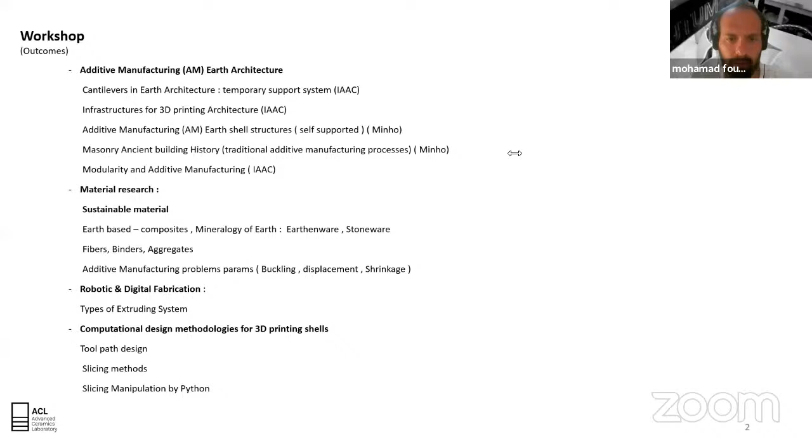And for the moment, we are trying to develop self-supported geometries in order to print shell structures. We are also making deep studies of the history of ancient masonry buildings, trying to mimic the building methodologies with adobe and translate them into 3D printing technology.

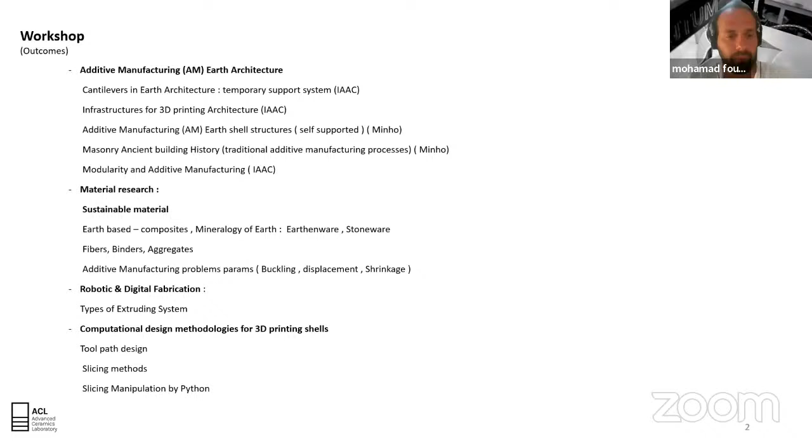I'm sorry, can you please?

Okay, I'll start now. This is the first project that I did at IAAC, my master thesis, and also in OTF, Open Thesis Fabrication. We studied earth material in depth and how to integrate it with the 3D printing process, concentrating on printing only cantilevers, or we can say corbels. First, we started with small prototypes, printing without any support to see what we're facing with the 3D printing process, for example the buckling issue, since we're printing layers of clay.

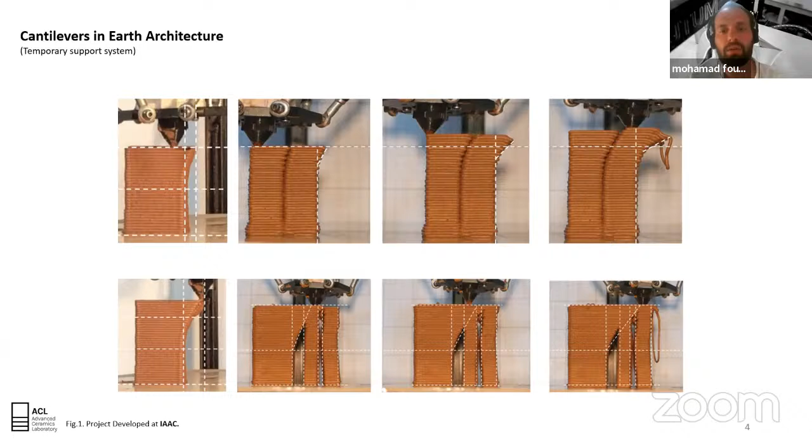After that, we started to add some printable supports to see if that would help prevent this problem or not. We tried different methodologies, and also made small prototypes of temporary support systems, trying to find out if that would be efficient through the printing process in order to print a complete cantilever, or a complete catenary arch.

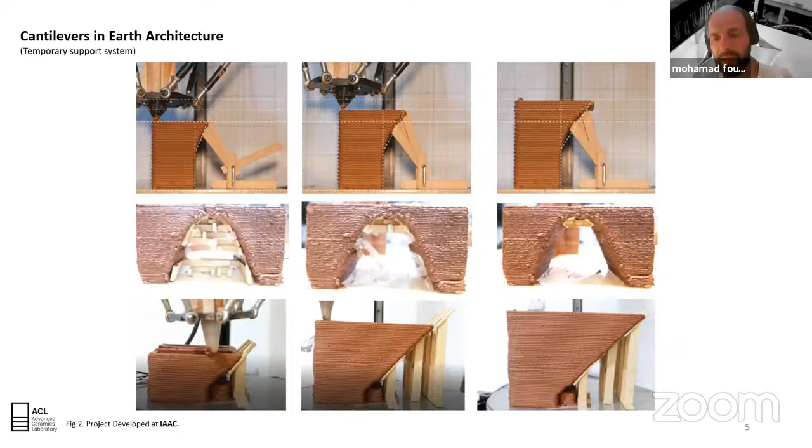After these experimenting processes, we made a transition to a larger scale, printing on wooden support systems with the robots, and trying to find out the best way to prevent the many issues we faced through the printing process. The main issue is the buckling.

Also after drying time, we are facing a shrinkage issue, and especially, as you know, earth material really works with compression, but with tension it doesn't really work properly. So, okay.

I'm talking about this project because I want to say it wasn't really 100% efficient, mainly because we found out, after adding a large amount of wood and trying to print on top of it, that we were trying to prevent one problem of the 3D printing process and manage it on the construction side.

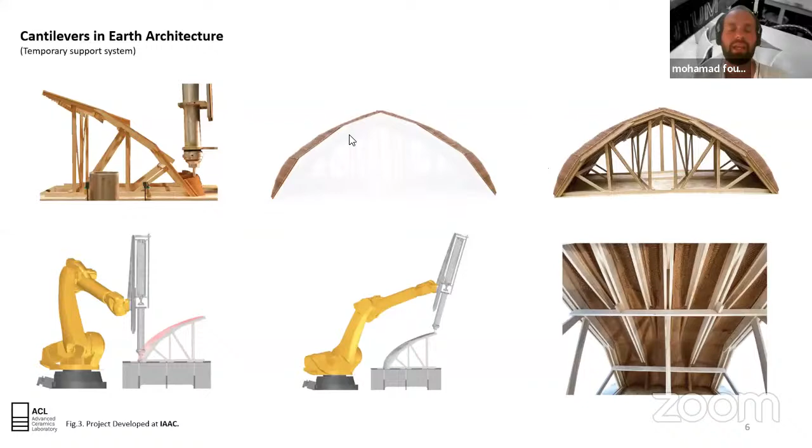So basically, from my point of view, I'm now trying in my PhD thesis to develop the geometry more, using computational tools, in order to print something already stable that doesn't need a lot of support from another material. So that is now my goal that I'm trying to reach in my PhD thesis.

In the PhD, you need to concentrate a lot on one point and try to tackle it in terms of materiality, and in terms of how you can develop the machinery part to support you in achieving your goal with 3D printing. So first of all I'll talk about the materiality part and the issues we were facing, especially with the earth-based composites.

The main issue with the 3D printing process is that we need to develop something with less shrinkage after drying time. For that reason, we tested two types of earth, one from Spain, named eco clay earth, and also one from Portugal. Here there is a city named Barcelos, really famous for stoneware clay, and the one from Spain is earthenware.

We did different experiments with different types of fibers, because we found that many researchers were adding fiber to reduce the amount of water inside the composite, in order to prevent cracking and shrinkage after drying time. But since we were adding a lot of fibers, we needed another binder to increase the plasticity of the material so it would be printable on the construction side.

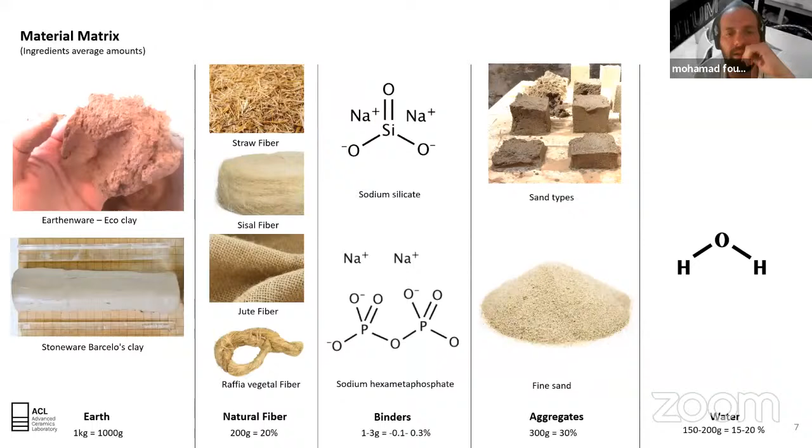After these tests with the ingredients of the composite we're developing in this research, we started to learn how to control and know how much water the fiber is absorbing in each composite. Because once we can develop a formula that will... I'm sorry, yeah.

Since we are trying to control the amount of water and the amount absorbed by the fiber we add to the composite, we did simple experiments, developing a mold for each kind of composite, then measuring the weight before and after drying, and comparing the two phases to reach a percentage and know that, for example, this type of fiber is... yes, I'm sorry.

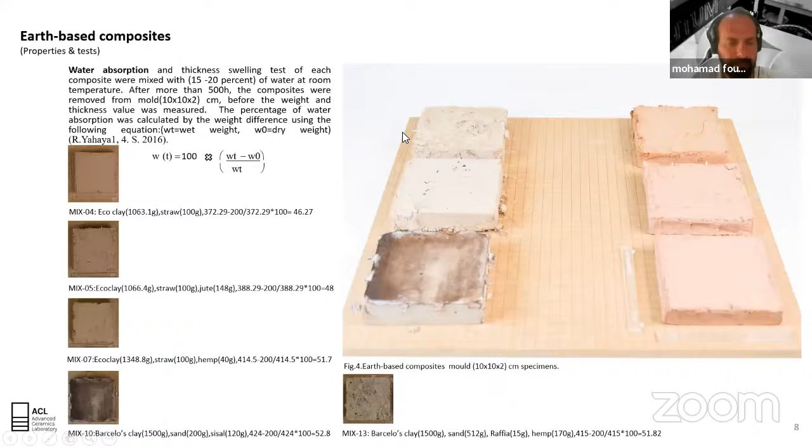So actually, as you can see here, we were testing with the Lutum 3D printing machine, and basically we found out that with the stoneware, with the simple amount of fiber, it was kind of easier to extrude than with the earthenware, the clay type that I was explaining before. So basically, we were trying to find a formula that controls these types of ingredients, like the amount of fibers, the binders, the aggregates that we add, and also the amount of water, in order to know that this composite will be extrudable, first of all, with this type of machine.

But in order to print more complex geometries, you need to control different parameters in the machinery in terms of flow of the material, in terms of the extrudability and buildability of the material, and the bonding between the layers. So all these issues are not just related to the type of composite that you are developing. It's also related to the extruding system that we are developing.

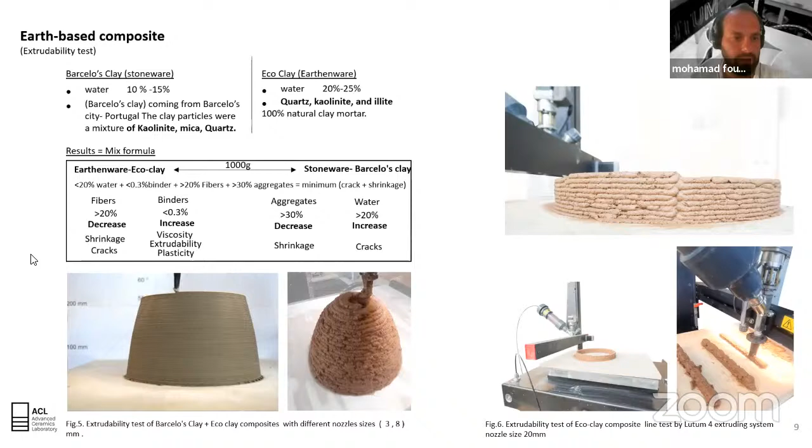Okay. For that reason, we started in this research to go further with the extruding system, how we can develop something that could extrude these types of composites with the fibers. And actually, it was really a bit hectic, because in order to extrude these kinds of composites, you need to control different parameters: the torque of the motor, and also the way that you push the material inside the extruder. So for the moment, we are developing a more advanced system than the pneumatic system. It's more of a linear actuator pushing system.

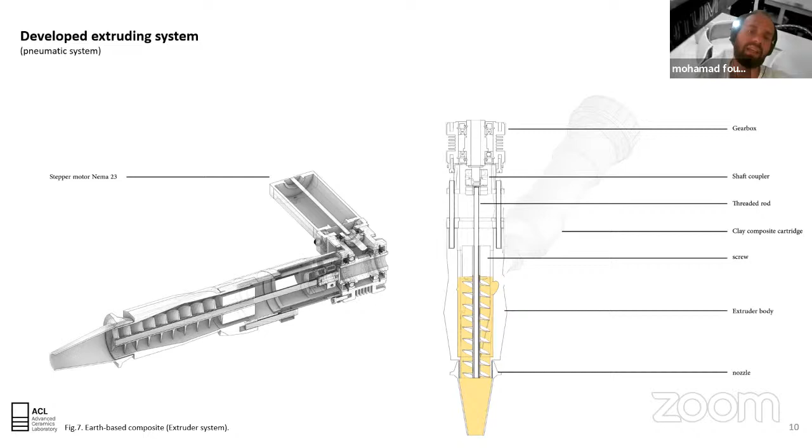Extruding a composite with fiber is really hard to do, but if you can develop something with high torque to push this composite, actually you can do it. But for the moment, in my thesis, I'm still developing this system in the coming months, and I will share it with you probably on the website in the university platform, University of Minho.

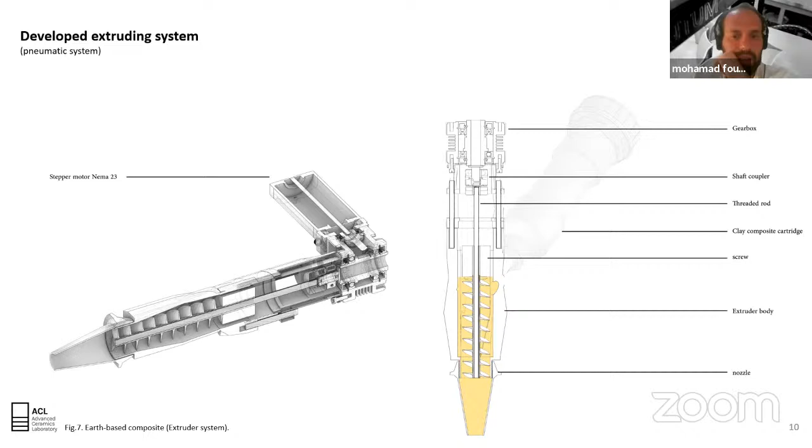So I'm saying this because in the construction side, there are a lot of systems that were developed by expert companies like WASP in Italy, and also other companies in different parts of Europe and also outside of Europe. But when you want to go on the construction side, you need to think about how you can add less material, because most of the projects developed with this material add a lot of material in order to be stable through the printing process.

And I'll also talk about the infill design and how you can develop something with less material, and also how to reach complex geometries like a vault and dome in easy ways. So in the construction side, for the moment, especially if you know about the crane system, it's not easy to control the printing process if you want to print a complete shell. If you want to print a vertical wall, it's fine for the moment. So now we are still developing this system, the pneumatic system, in order to successfully print earth-based composites.

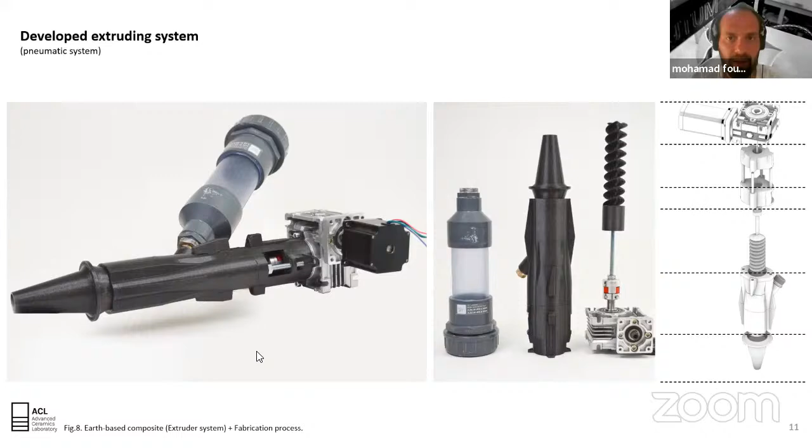But the main issue, I'm sorry, it just takes time to move to the other slide. Just give me a second, please. Okay.

So before starting with this topic, like I was saying, normally in order to extrude this type of material, you need to control the materiality and machinery part. You need to know that the machinery you are using, especially in the construction side, will support you to extrude these types of composites, and also to print advanced geometries like a shell system, with different types of cantilevers, because the issue with the cantilever in the printing process is really tricky. After doing different experiments on the small scale, imagine it on the larger scale.

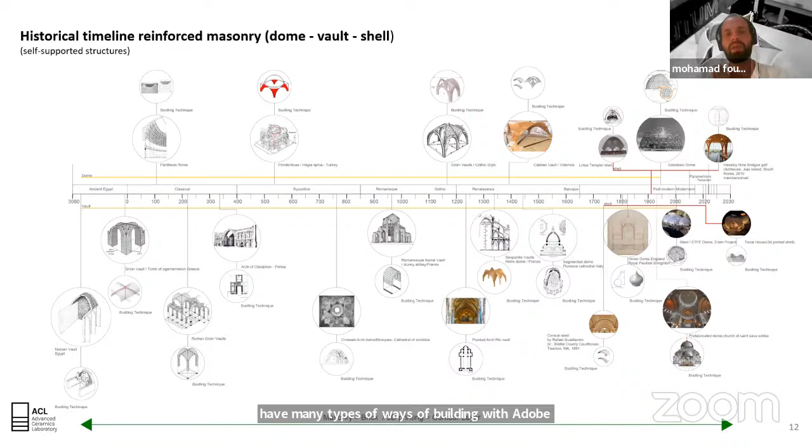So for that reason, we said okay, we should go back to the old masters and study the methodologies they used for building vaults like Nubian vaults, Catalan vaults, and Gothic vaults. There are many types of ways of building with adobe, adobe bricks especially. So the main idea was studying the history of building with adobe, because you can say it's an ancient traditional 3D printing process.

So we were thinking, if we study all these methodologies of assembling the blocks and try to translate them into contour layers, because as you know, the most famous methodology in additive manufacturing is contour crafting. Contour crafting is a sectioning method of the geometry that you want to print or build, controlling the contour path. So these issues are really similar.

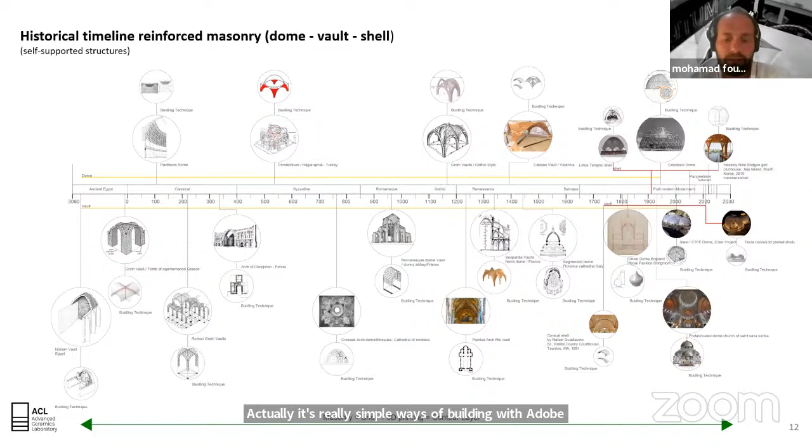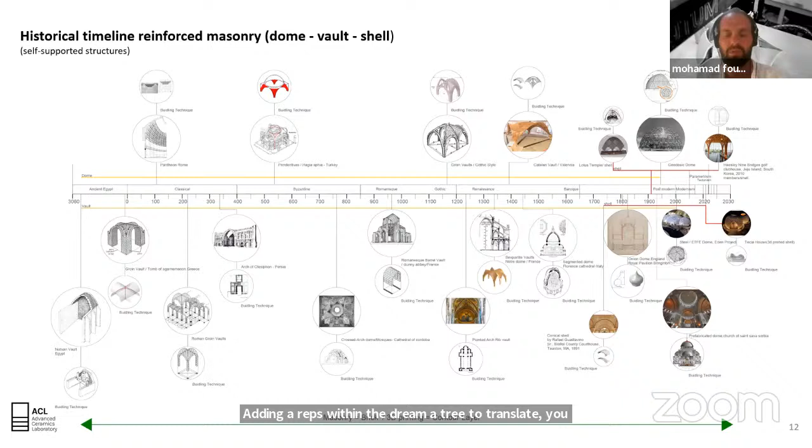It's really similar to ways of building with adobe blocks. So we were studying different types of methodologies, and we found out that mainly they were adding ribs within the geometry to translate the forces within the shell system to many parts in order to support each other.

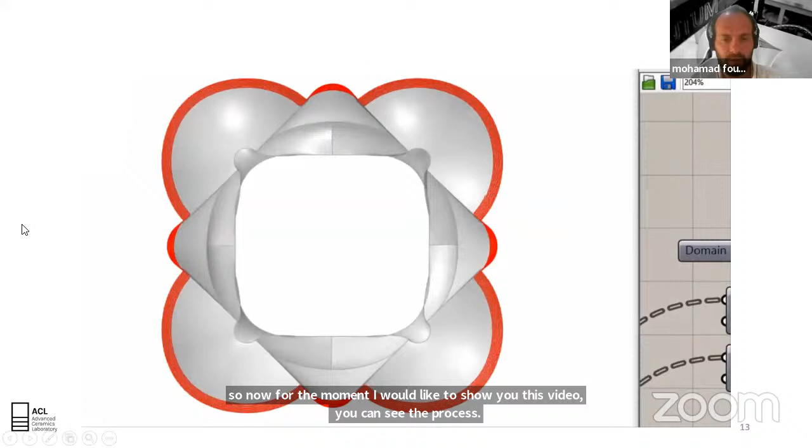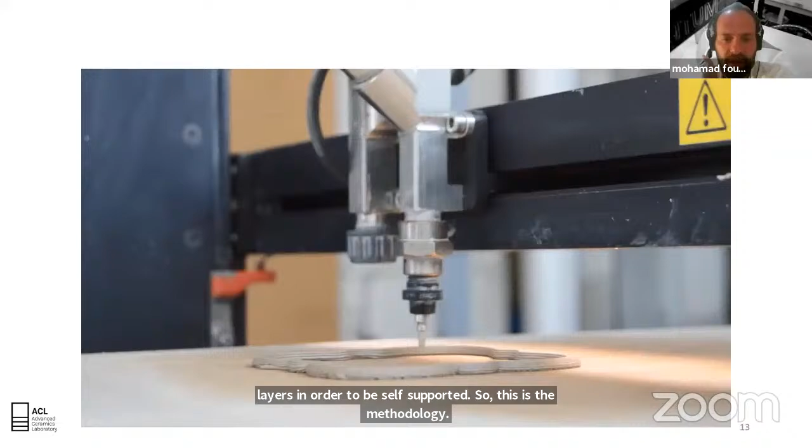So now for the moment, I would like to show you this video. You can see the process of assembling and building the layers in order to be self-supported. So this is the methodology we were trying to tackle and see in reality how that will affect the printing process, a small scale prototype for the moment.

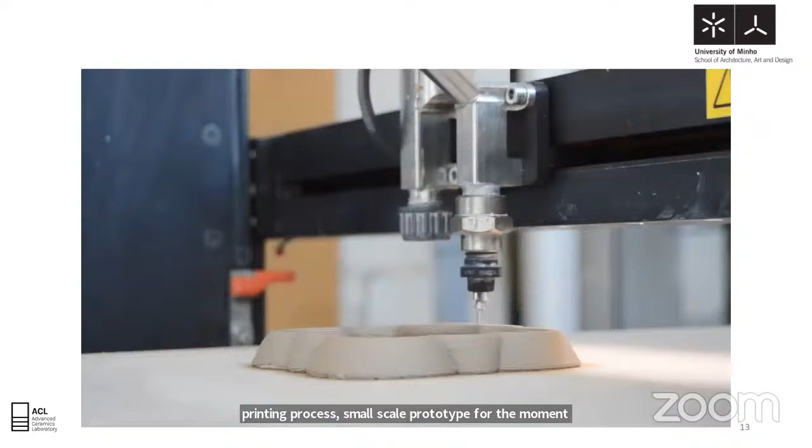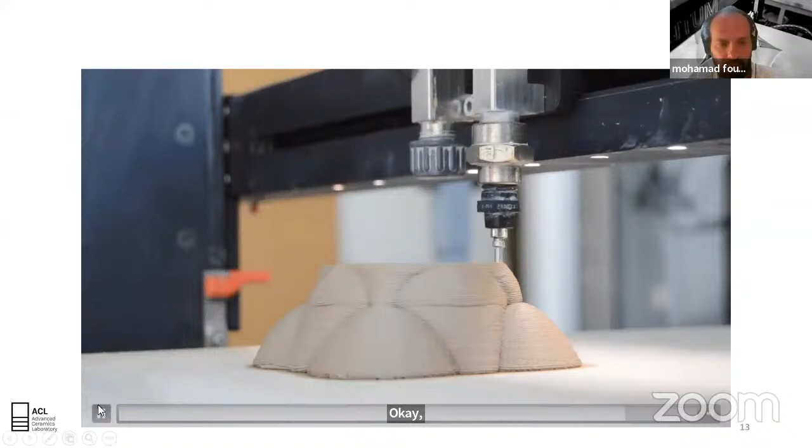So as you can see here, we were trying to use a methodology like pendentive elements, as in Hagia Sophia. They were adding pendentives into Hagia Sophia in Turkey to support the dome. Okay. So you have two types of geometries that are supporting each other to prevent the buckling issue.

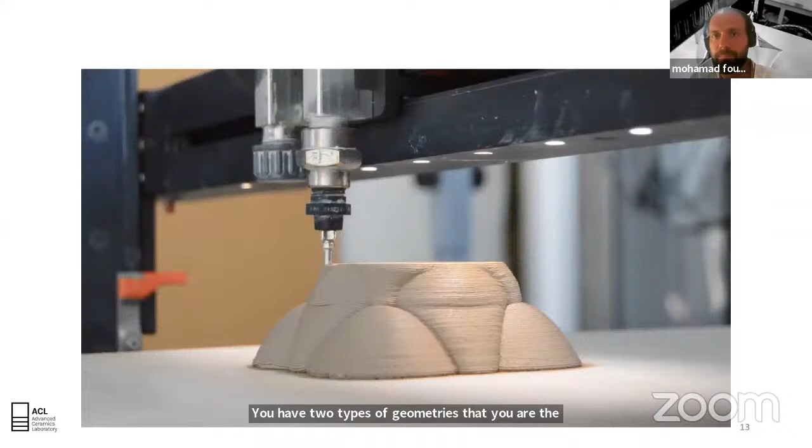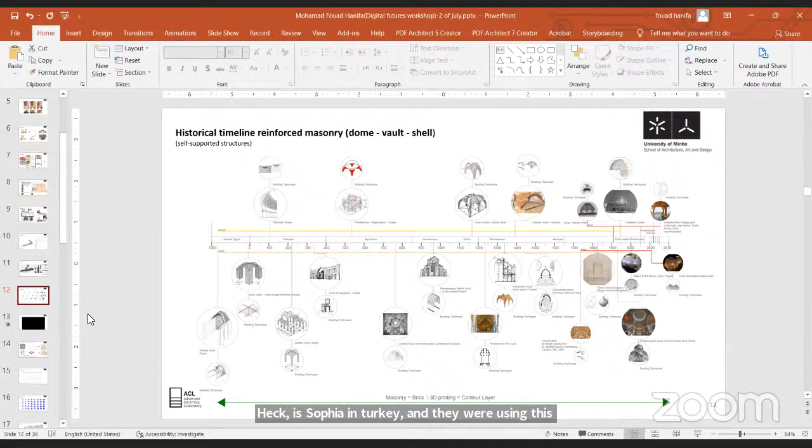So basically, we extracted these methodologies, as you can see here, from a building technique in Hagia Sophia in Turkey, where they were using the pendentive element as a geometry in order to support the whole part of the building, the dome or the shell. So we found out we could use this methodology in the printing process, and there was also another methodology.

After studying the topology of the surface of the shell, basically they were dividing and segmenting a surface into two layers of ribs. These layers of ribs were supporting the whole surface or mass of the shell. So you can see here we also tried to translate this methodology into contour layers in the printing process. And actually, for the small scale, it was kind of successful.

But in the large scale, we need to study more in depth the material composite that we are developing right now to fabricate with the robot. So, okay.

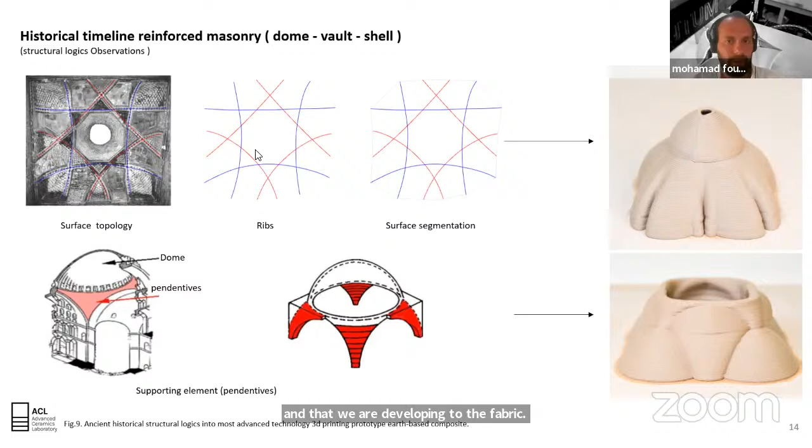So basically, as I said before, we are trying to do a comparison between the 3D printing contour layers and the adobe or mudbrick blocks, and trying to find out the best methodology to prevent problems like buckling issues, and how we can print something stable.

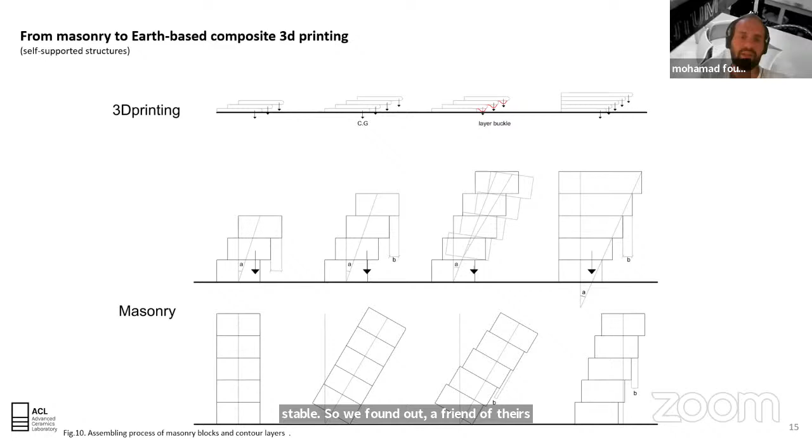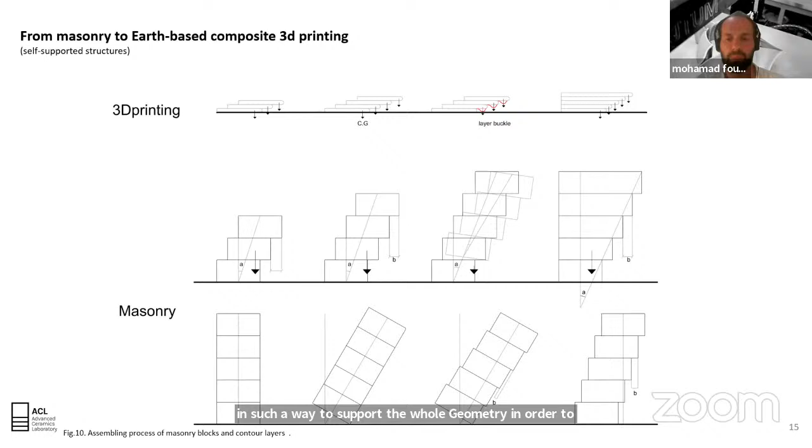So we found out after testing two methodologies that we are trying to increase the local inertia or the global inertia of the geometry by segmenting the surface and adding more masses that are controlled in such a way to support the whole geometry, in order to reach something self-supported without adding any support or any other material.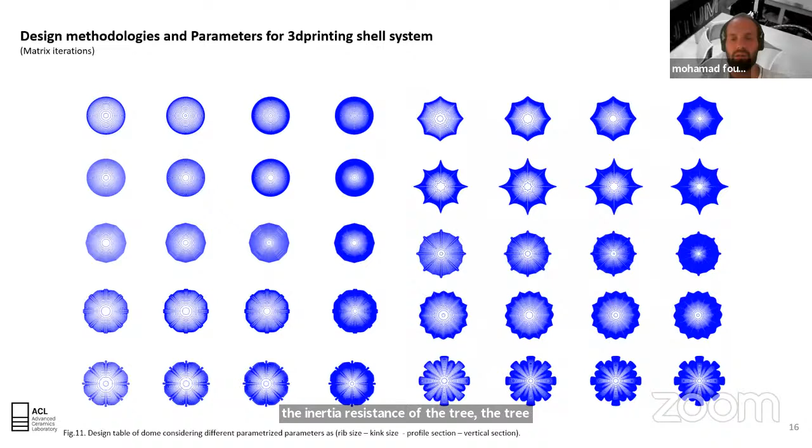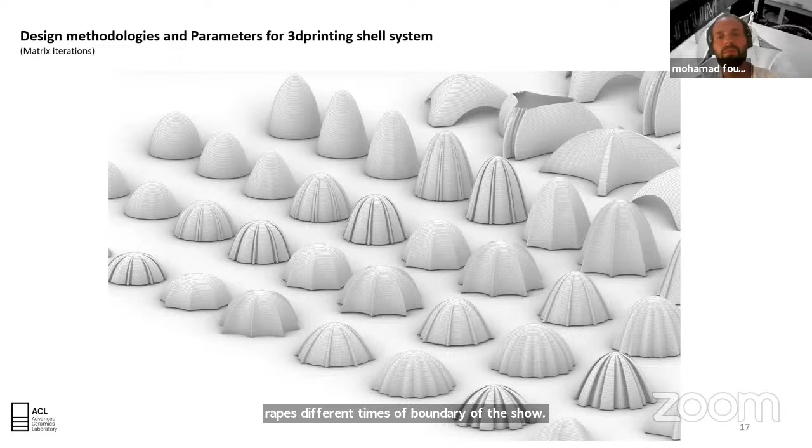So as you can see here, we did different types of iterations, different methodologies of organizing the ribs, different types of boundary of the shell. But basically, for the moment we are concentrating more on the circle boundary.

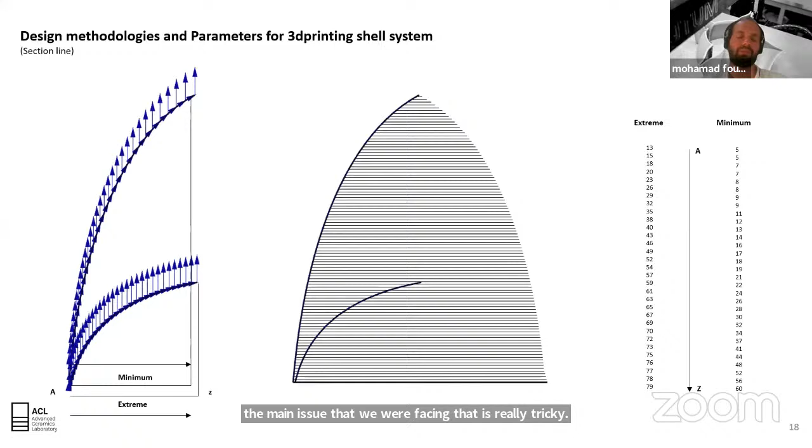So the main issue that we were facing, which is really tricky, is that you need to control the profile section, because by controlling the vertical section of the geometry, you can control the angles of the cantilevers within your geometry. So when you go with extreme angles, you will face more buckling issues and more issues with failure.

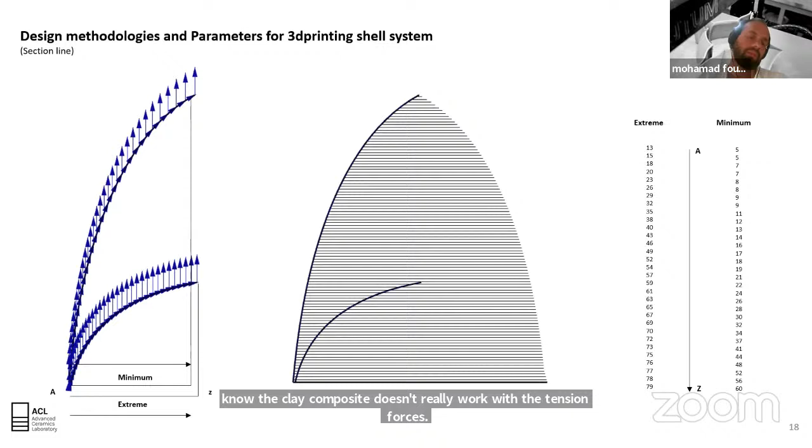Because as you know, the clay composite doesn't really work with tension forces. So this issue we are now trying to develop in terms of materiality, by trying more fibers that will work as a tension system.

But still, as I said, we're still developing this part. But mainly now, I'll try to concentrate more on the design methodology of the geometry for the 3D printing process. So we started to test the minimum section, after different simulations of the overhang angles, trying to know what is the best section line that we can use to print these types of simple geometry.

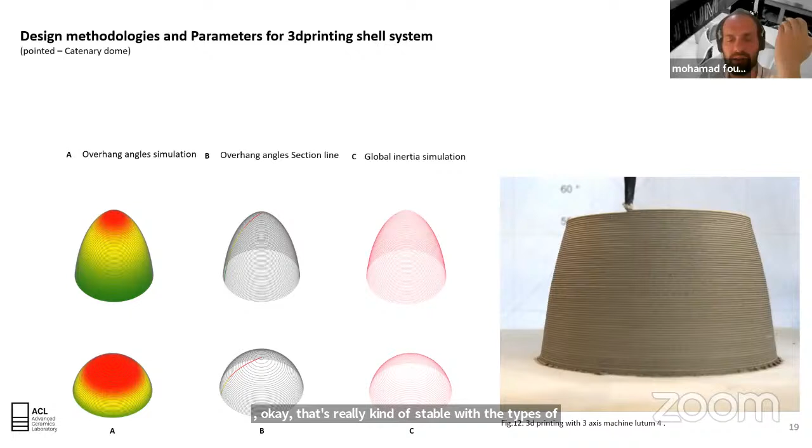And we started with a catenary arc, and we found out it was really kind of stable with these types of clay, and also using a planar system of 3D printing like a Lutum machine. And then we did something more tricky by cutting half of the geometry and seeing what is going to happen after this.

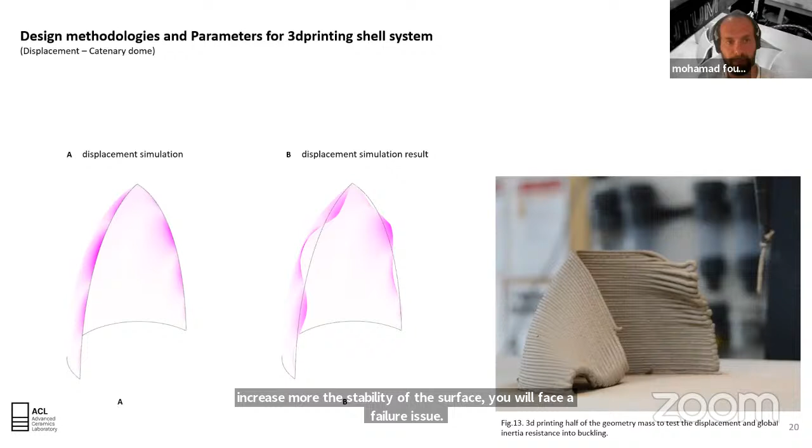So basically the main issue is the displacement of the layers and the buckling of the layers, especially if you are not adding, as I said, more ribs or small methods that will increase the stability of the surface, you will face a failure issue through the printing process. So after that, we tried to add kind of a system of ribs.

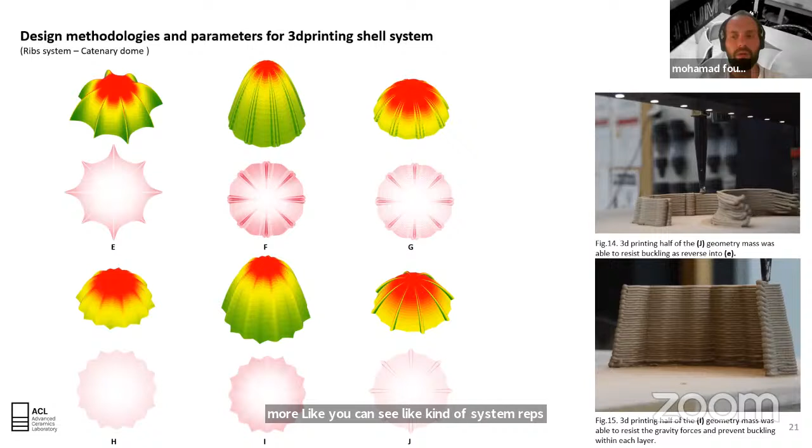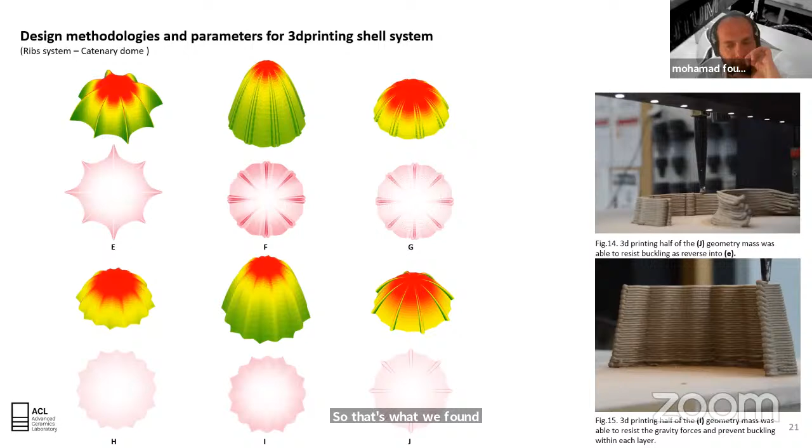We found out the more you add mass, or the more you increase the surface area by controlling the distances of these ribs, or also if there's a kink within the surface, it will help a lot to print stable layers. So that's what we found out through these small prototypes.

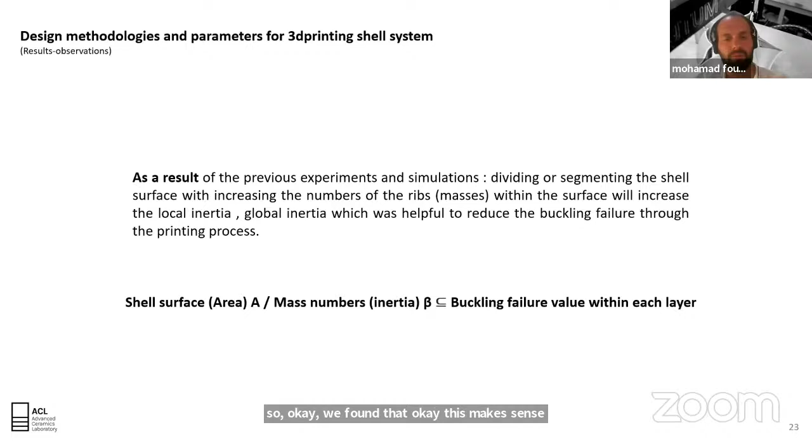So basically what we found out is that we need a formula. The main formula: the more you increase the surface area of the shell, it will help you a lot to print a printable vault, or a printable dome. So we found out this methodology will be helpful for us in order to print more complex things with more extreme angles.

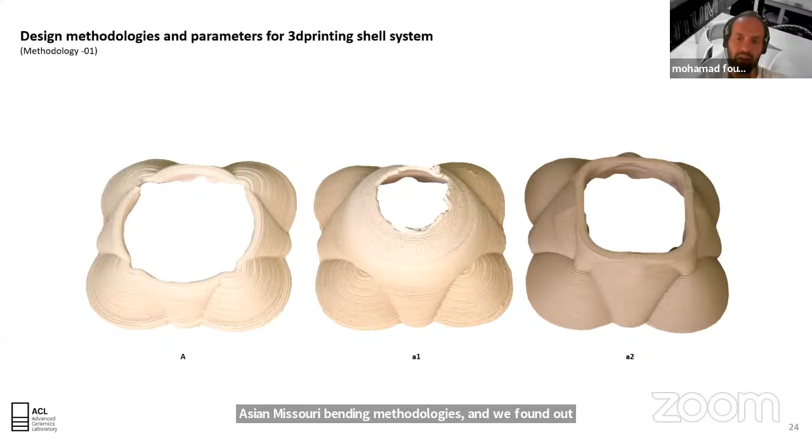So we went back to the methodologies that we extracted from Persian masonry building methodologies. And we found out, if we have a basic methodology and try to mix it with other methodologies, that probably will help us to print something that could cover more surface area. Mainly, as you know, until now it's really hard to print a complete roof. It's not controllable yet 100%.

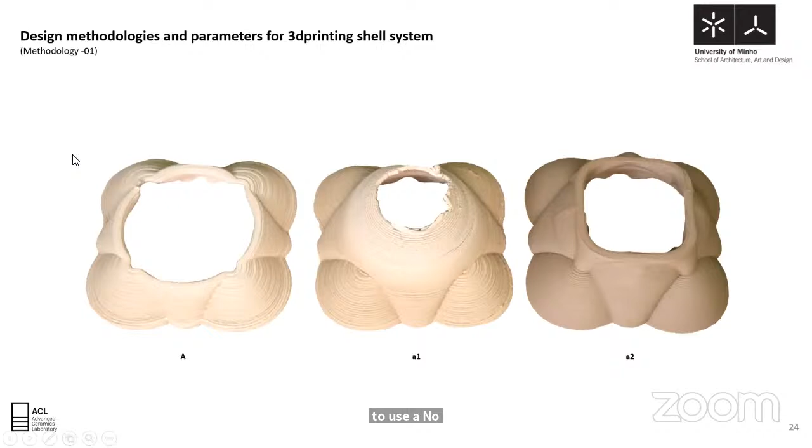So that's what we are developing in this research. We need to reach something that could be printable and has a specific methodology that, for example, builders or researchers can use as a methodology in the printing process.

So after that, we also went back to the old methods of building with masonry, and how they were carving the mass of the geometry that you are trying to build, and stacking specific elements inside the whole geometry in order to be stable.

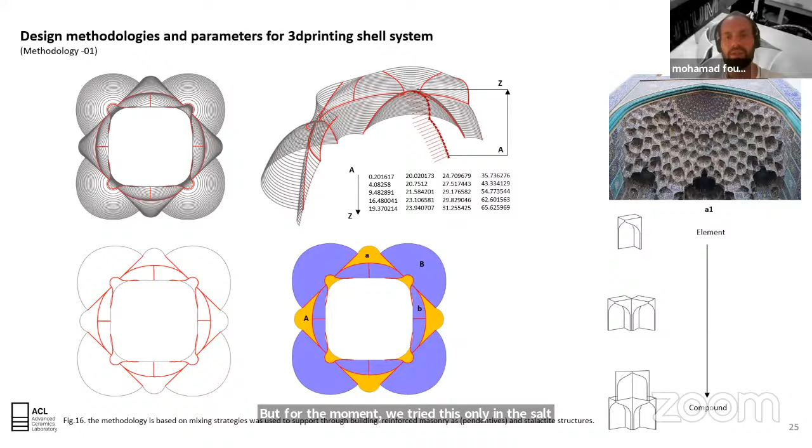So it was a tracking line for us to know how we can develop a section line that is printable. For the moment, we tried this only at small scale, but later we need to try at larger scale. So basically, these two methodologies were extracted from old masonry building methodologies.

Now I'll talk about a third methodology we are studying. As I said before, the machinery part is actually the main part in order to reach something successful in the printing process. So controlling the planes, because since you are trying to print the layers, it's controlled by the points, or we can say the vectors. Now I'm speaking in computational design.

So basically, since you are doing contour crafting methods, you are sectioning your geometry. So you need to translate this data as planes and points to your 3-axis machine or 6-axis machine like a robot. So how can we benefit from these extra axes?

So we found out, with other researchers, that since we are trying to control the layer height and the condensation of the earth layers, that will also help us to know how much mass or inertia this surface of the shell has, and how that would be supportive to print a complete shell without any failure.

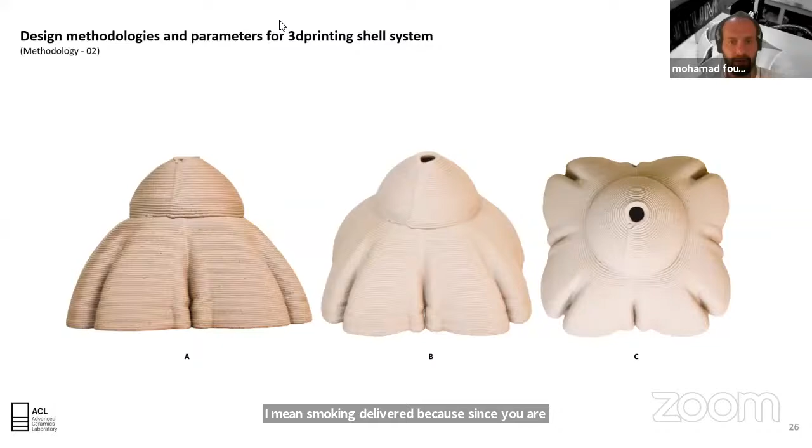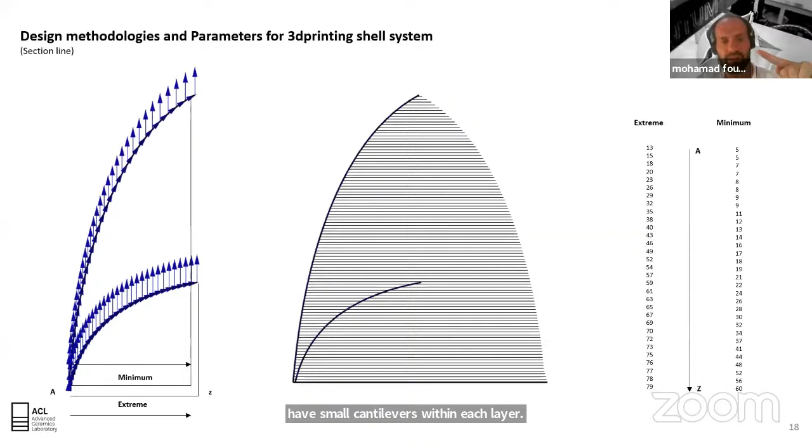You can see here, for example, since you are printing each layer, it has a different angle. So you have small cantilevers within each layer. But if you are rotating these axes to be 100% bonded, you will prevent this issue, and you will solve a lot of buckling issues.

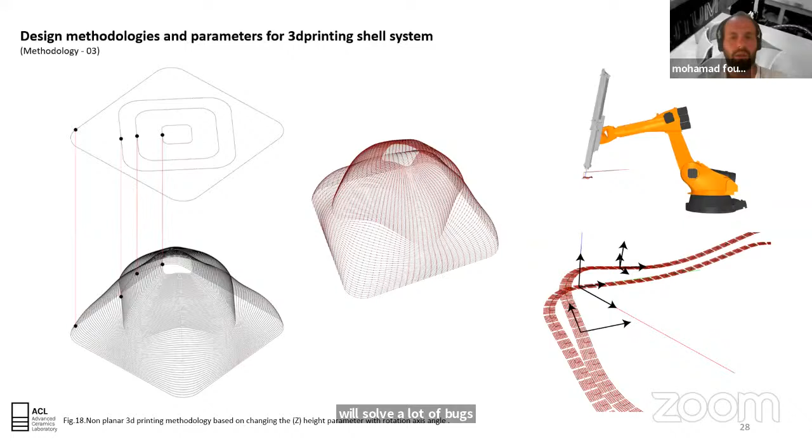So there was a third methodology, but we didn't test it yet because we're still, as I said before, developing the extruding system for the robot. But now we are studying the computational and simulation part of this methodology.

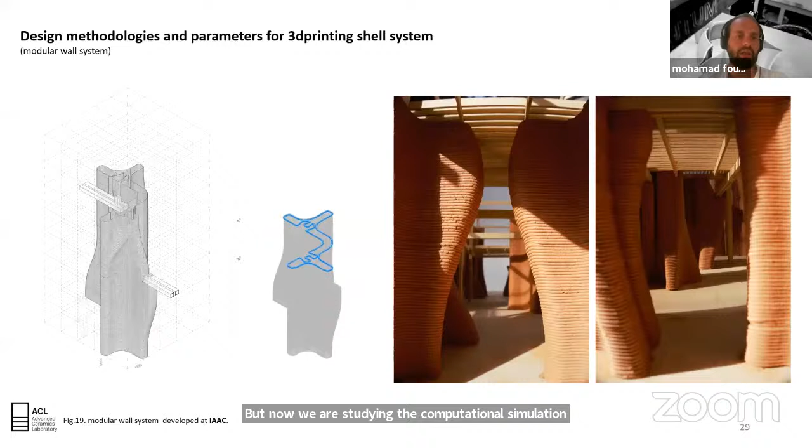Also, I will talk about a project developed at IAAC in my master thesis. Basically, it was developing, as I said, a modular system in order to be integrated with the neighbor, a vertical modular system with small cantilevers. We were concentrating a lot on shells, but we were concentrating on developing a wall with the cantilevers. So you're mixing vertical elements and also the corbels or the cantilevers in order to create a kind of circulation way.

As a methodology. But the main reason that I'm showing this project is that we weren't actually concentrating on building a complete roof. There were other students also studying how you can print a vault or a dome at the IAAC.

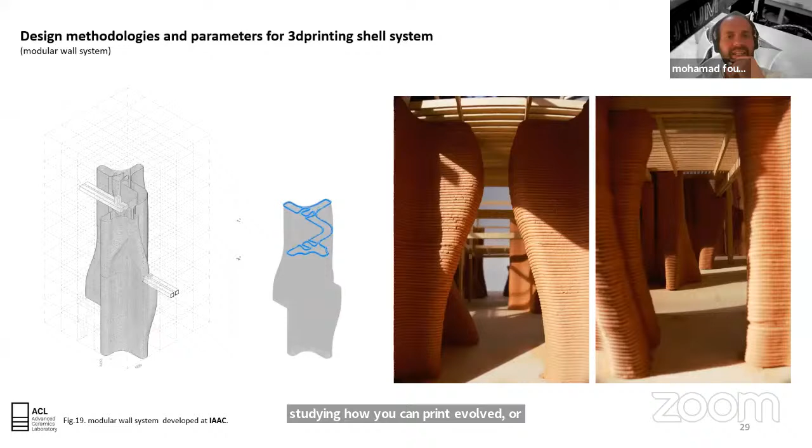But basically now what we are trying to do in our research is merge the two methodologies, a modular system with the shell system. So you can integrate this geometry as a habitat system. It could be integrated with a neighbor. It could also be an urgent shelter. So for that reason, we're trying to find something efficient with less material and printable.

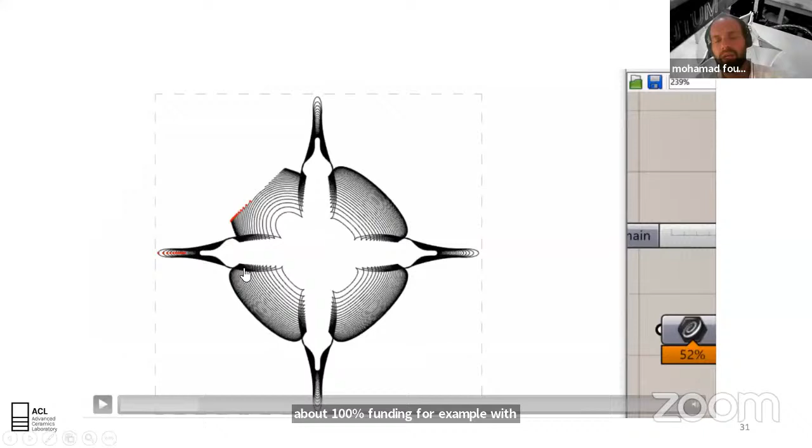So in this video I can share with you now, as you can see here, we are controlling not just the amount of layers and the layer height, but the way that you control the axis of the machine in order to make a 100% bonding. For example, with a planar process you cannot do this, but with a robot you can control the path of the layer that you are printing.

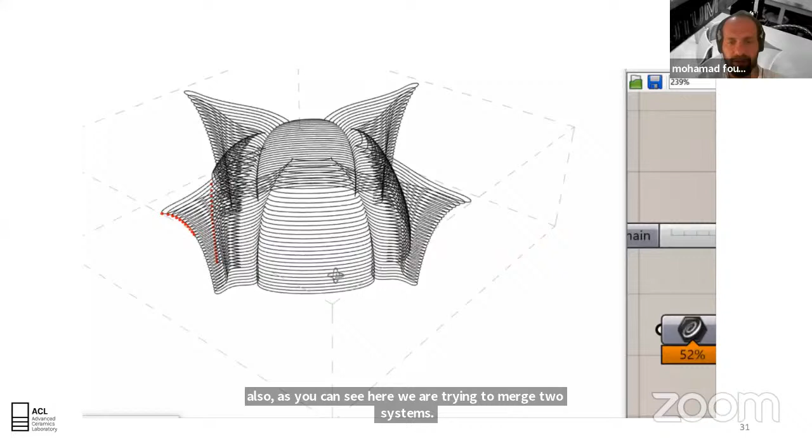And also, as you can see here, we are trying to merge two systems, a cantilever with a shell system, in order to integrate different modules with each other by using a wood material, for example.

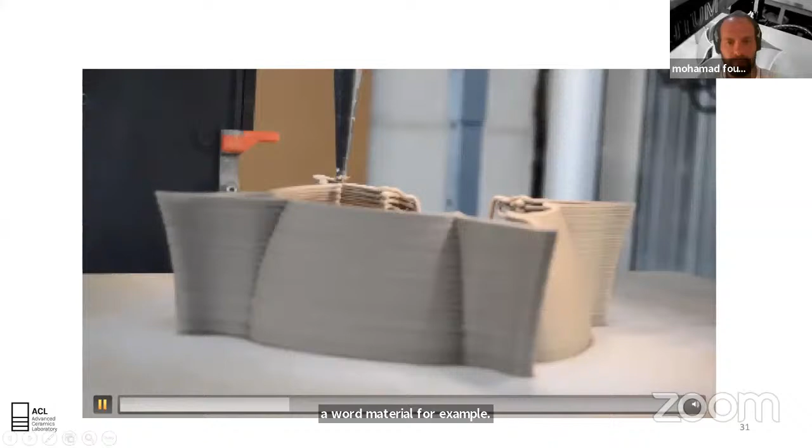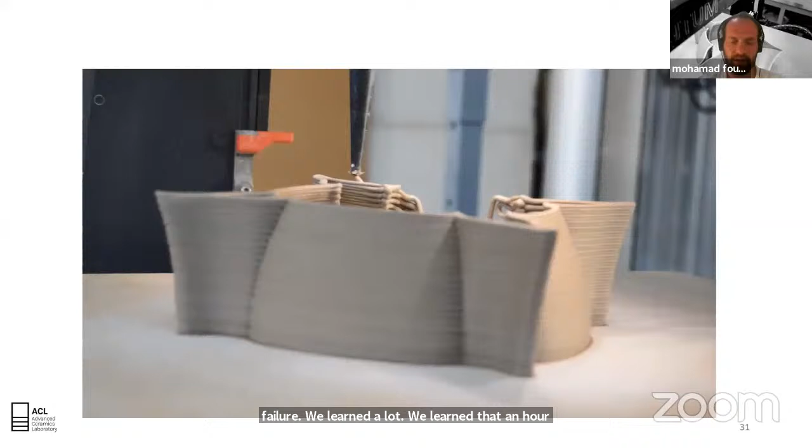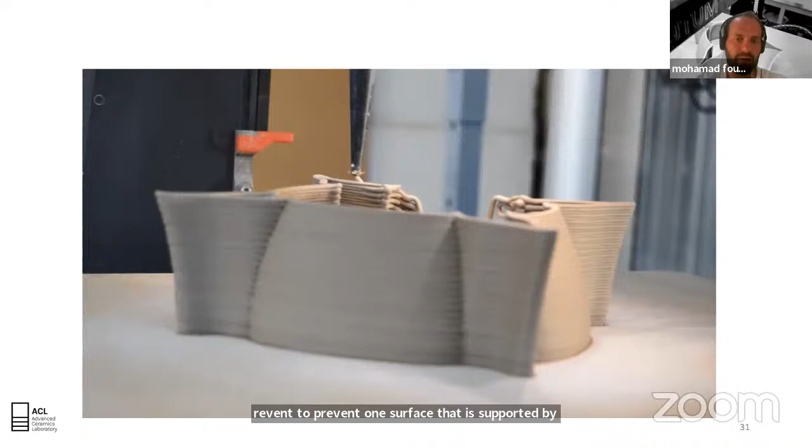But now I'll show you a failure. From this failure, we learned a lot. We learned that in order to print one surface that is supported by itself, without any other materials supporting the printing process, we need to think about the material type, the way that you extrude the material, and also the way that you control the geometry itself through the printing process.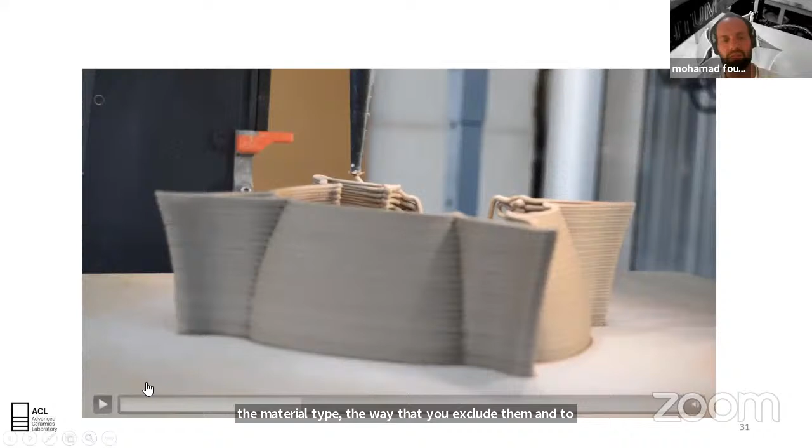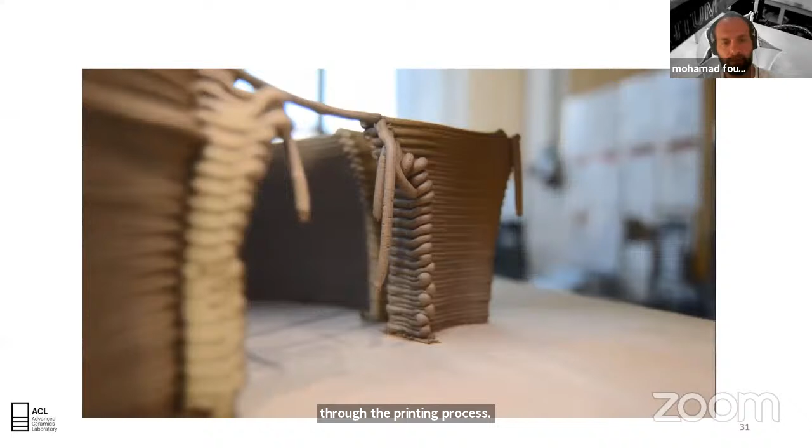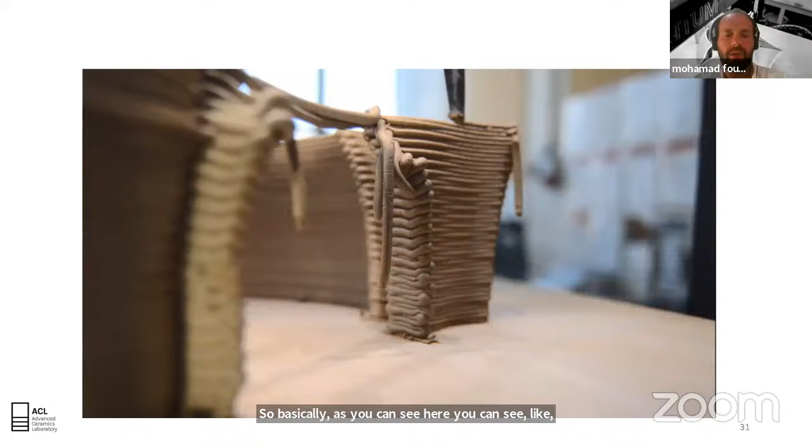So basically, as you can see here, it was really a lesson for us in how you can control the buckling and the failure issues. This composite was only stoneware with sand. We didn't add fibers or any other additives, but we were controlling only the path, and we were trying to see that the more you change the angle, the more you will face issues in the printing process.

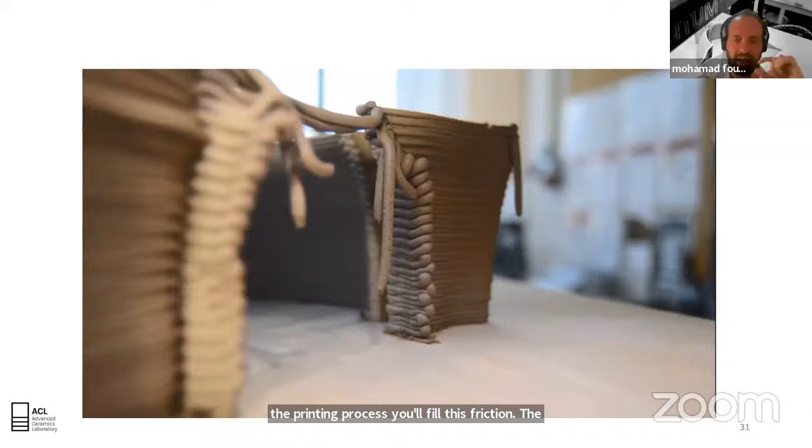But this is with a planar process. Since you are using a robot or changing the axis, the result should be different. We also learned that in the printing process there's a friction issue between each layer. You can solve this by adding more sodium silicate. It increases the bonding between the layers and prevents the sticky issue, because if the material is sticky, you will face friction issues in the printing process.

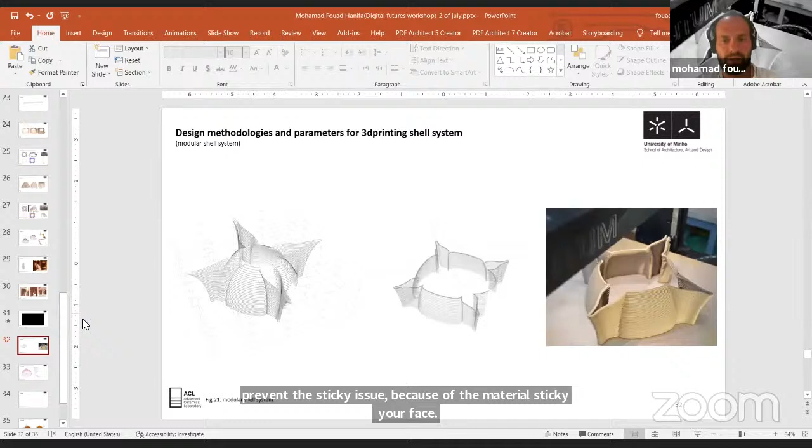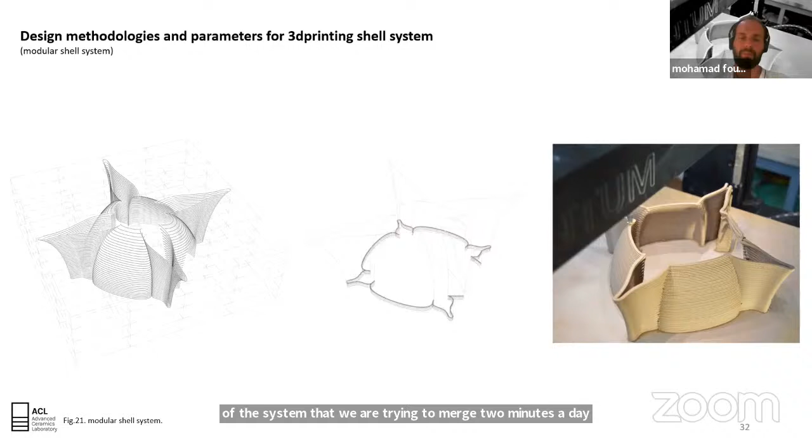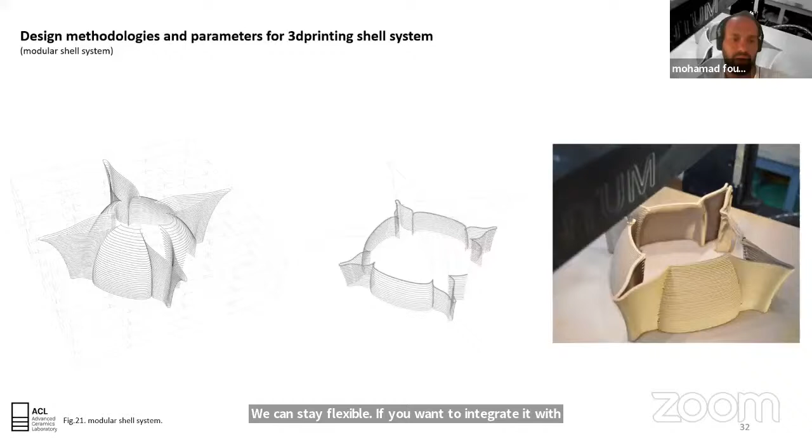So as final findings, we were trying to control the path of the layers, the material composite, and the design geometry of the shell system, merging two methodologies in the building process and the surface design in order to be buildable and printable, and also flexible if you want to integrate it in the construction site or in the neighborhood where you want to print your own habitat or shell.

After that, we found out that in order to develop something more advanced, we're developing a Python component, the one that I shared with you. For the moment it's a simple component that gives you a spiral mode of printing a shell geometry, but now we are trying to develop slicing methodologies through this component using a Python script, in order to understand different types of shell geometries and the best way to slice them, to help us simulate printable layers or printable geometries.

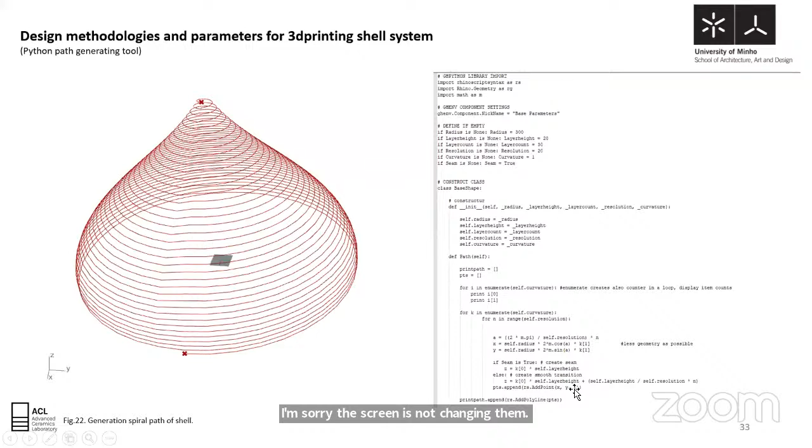I'm sorry, the screen is not changing now. Sorry. No, it's working. It's working. Okay, perfect. Thank you.

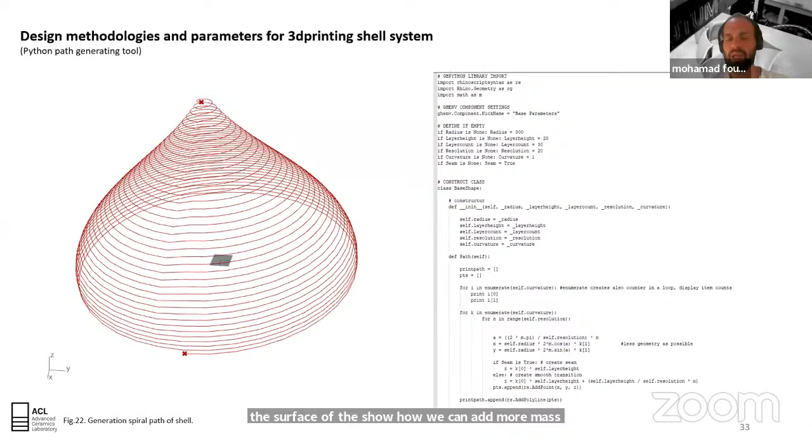So as I said before, now we are trying to merge the computational tools by using scripting languages in order to understand how we can segment the surface of the shell, how we can add more masses and control these masses, and if we want to print a complete shell with extreme angles, because we want to cover more area in the plan that we are trying to cover.

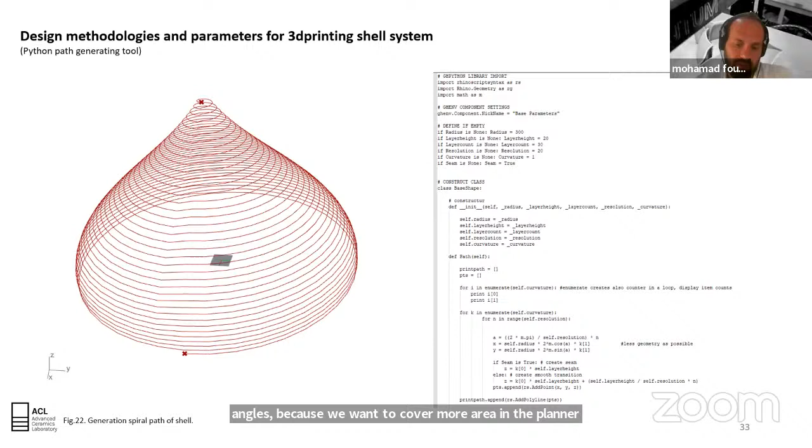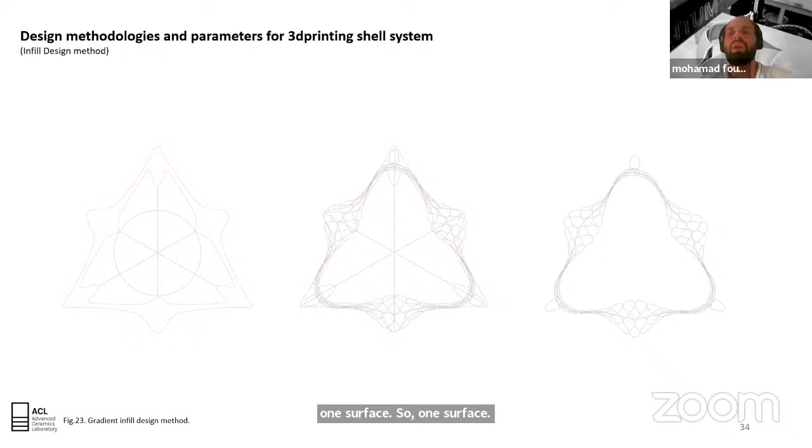So after this, as you know, most of the projects developed right now with these types of technology always add infill design with two surfaces. Basically all the prototypes that I showed you use just one surface. So we are trying to reduce the amount of layers that we need in order to be more efficient in the construction site. But this will show us more problems, as I said, like the failure issues.

But what we are trying right now in this methodology is how we can develop one surface as an infill design and do a gradient effect. This gradient effect will eliminate, or change, the layers into one surface, and on the other side you have one bulky rib within the shell surface.

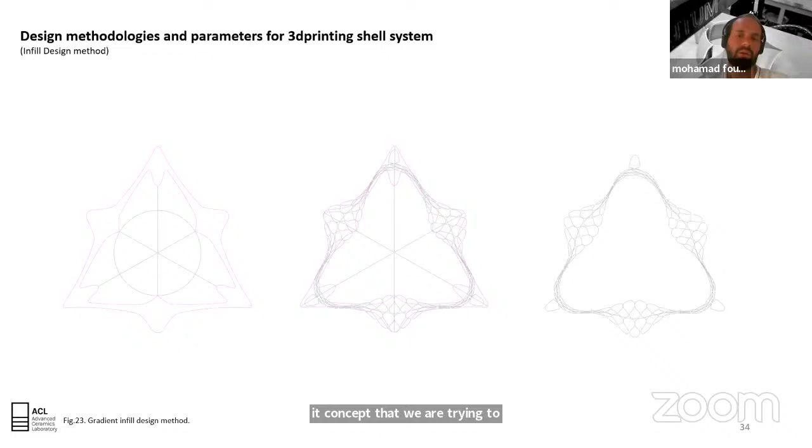So it was a concept that we are trying to develop with the other design methodologies that we are studying. As a perspective concept, I hope, in the final goal or aim of this thesis, we want to reach something of this complexity that is printable in the construction site.

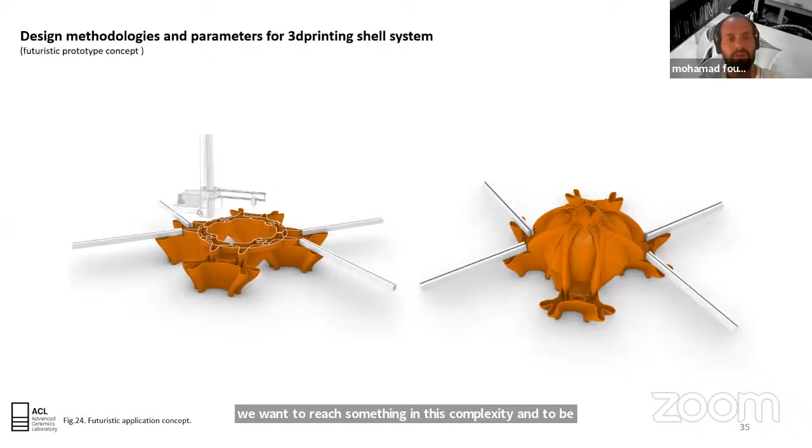So for the moment, these things are still incremental research. A lot of my colleagues in the lab, the Advanced Ceramics Laboratory in Guimarães, Portugal, with the support of different labs, Lab2PT, and this kind of association in Portugal, are developing different research projects in terms of ceramic materials and other materials like concrete and biomaterials.

But basically, in my thesis, I'm concentrating, as I said before, on earth-based composite. What we are trying to prevent is how we can solve issues in the printing process, like shrinkage and cracking, reducing these problems in order to reach a final application we can apply in the construction site, with efficient ways.

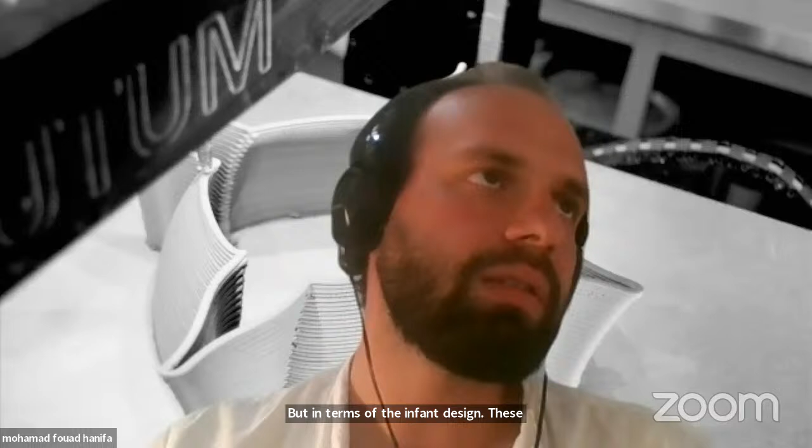So basically, the mechanical model was based on segmenting the surface in a computational way and adding masses organized in an ordered way to support the whole model. In terms of the infill design, you need to make intersections between the layers, and we were also trying to think about the structural performance of the geometry. So we used a gradient methodology, because at some parts of the profile section you have more surface area and more intersections within the infill design, so you have something more stable.

And at parts where you don't need to support the surface, you have less material, so the infill has fewer intersections. So basically, the two main bases were controlling the surface area at certain points of the profile section, and controlling the intersection between each cavity of the profile section. I hope that I answered. Thank you. You're welcome.